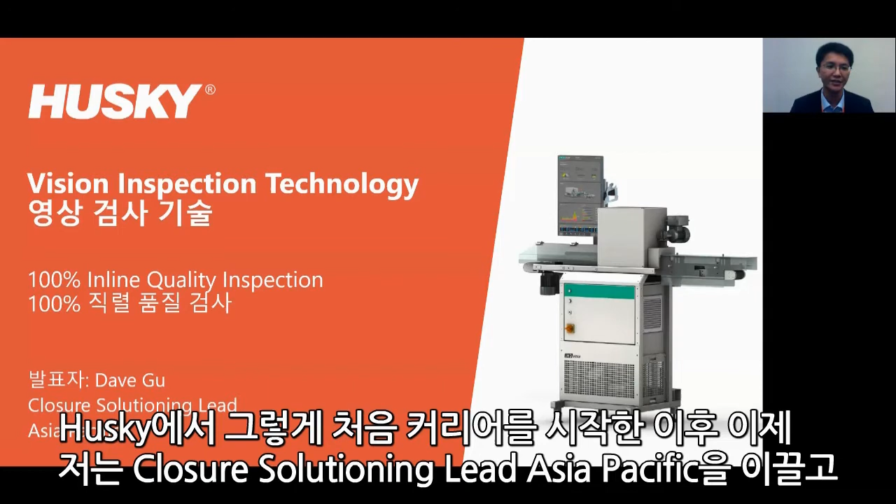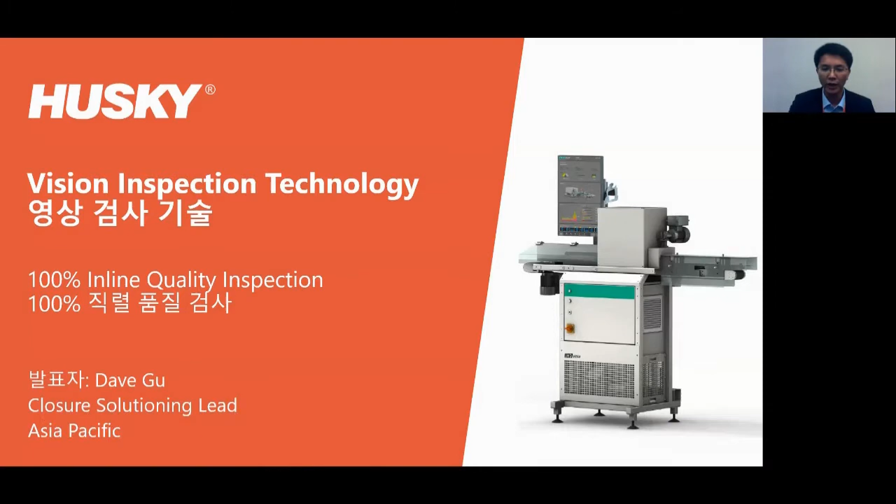In case any questions, we can review later in the Q&A session. First of all, before we run into the details on the vision inspection camera configuration, here is a quick overview on how the HyCAP4 closure system workcell looks like.

As you can see on the screen, typically for a complete workcell layout, apart from the injection machine and the mold, which is really the critical equipment for the system, there are also quite some downstream equipments to process the closures right after the injection mold. For example, there are multiple downstream equipments, including the hopper, the undermold conveyor, and the cap coolers to cool down the closures after the injection mold. Then we have the feeder conveyors to transfer the closures through the waterfall sorter to orient all the closures and then feed them into the vision inspection system. And then after that, to fulfill the closures into the box shifter.

So here I'm highlighting equipment number item 6, and this is the one that I'm going to share with everyone now.

Now that we know that closure is a goalkeeper for the whole product package safety, it really plays an important role for product safety. And as a high-speed running closure system, it's really important to make sure that all the closures are 100% inspected, and at the end, only the good closures run into the production line.

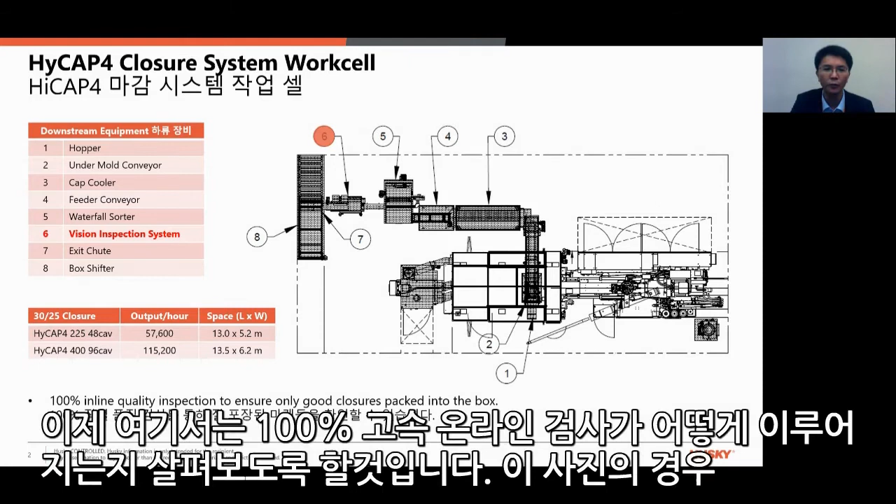So now here is to explain how the 100% inline inspection is working on the Husky HyCAP4 closure system. This picture basically shows you how the vision inspection camera is working, providing comprehensive functionalities to make sure only the good closures bring into the production line.

For example, it includes the inside inspection and outside inspection, the 360-degree outside wall inspection, and we also inspect the top panel of the closures. In the meantime, there's also an additional function for cavity number recognition.

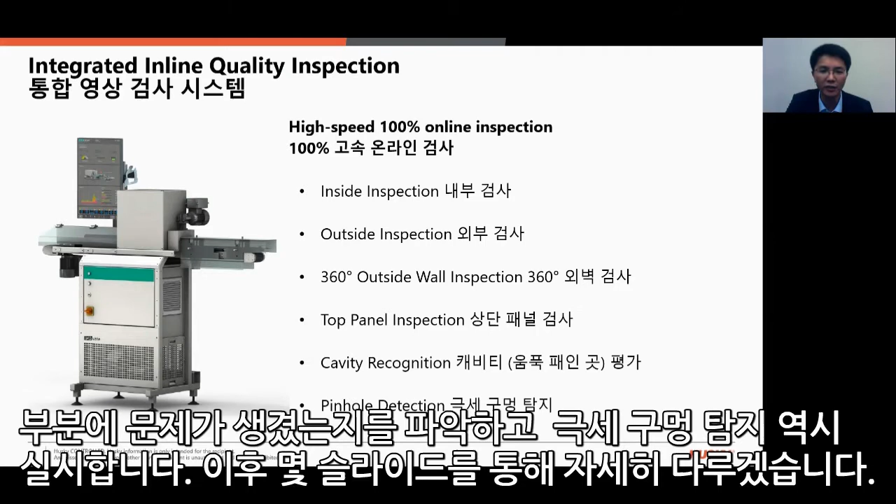This is also very important, especially when we are running mass production. In case there's something wrong in a specific cavity, this function will provide traceability of where the mold has issues. Last but not least, it's about the pinhole detection. I'm going to share more details in the next few slides.

Now here is the typical configuration of the vision inspection camera. Typically, from the right side to the left side, for a comprehensive configuration there are basically 2 conveyors delivering all the functions that we just mentioned in the previous slide.

For example, there are first a few cameras on top of conveyor A to inspect the closures from the inside, and the ovality and cavity number reading functions. And after that, there are also 3 cameras to inspect the closure outside wall 360 degrees that we just mentioned.

As we just mentioned, we also inspect the closure top panel. On conveyor A, there's no chance for us to inspect the closure top panel. Therefore, we need to shift the closures onto conveyor B so that camera 3 can detect the top panel of the closures in this case. So this is typically how the configuration looks like for a vision inspection camera.

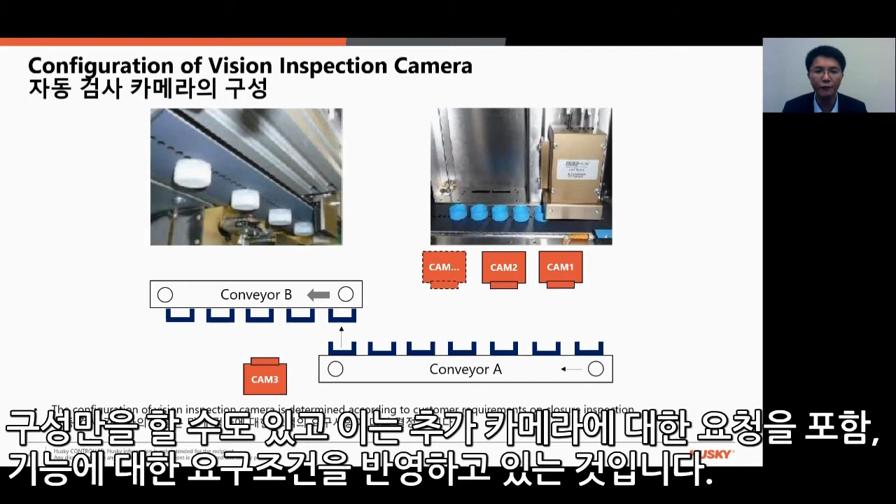Now we are going to run into the detail of each function, how they work, and what defects can be detected from these cameras. Number one is about the inside inspection, and this is the default option. It's typically the very basic and mandatory one that most of our customers' systems are equipped with. First of all, such a camera for inside inspection detects short shots on the tamper evidence band.

If our customers are running closures with color, typically at the initial start there may be some slight color deviation, and this camera will be able to detect this color deviation and reject these closures to the scrap box. So as mentioned, this inside inspection is mandatory and important to make sure all the inside of the closures have good quality, as in the end the inside is the one in touch with the preform neck finish to deliver package safety.

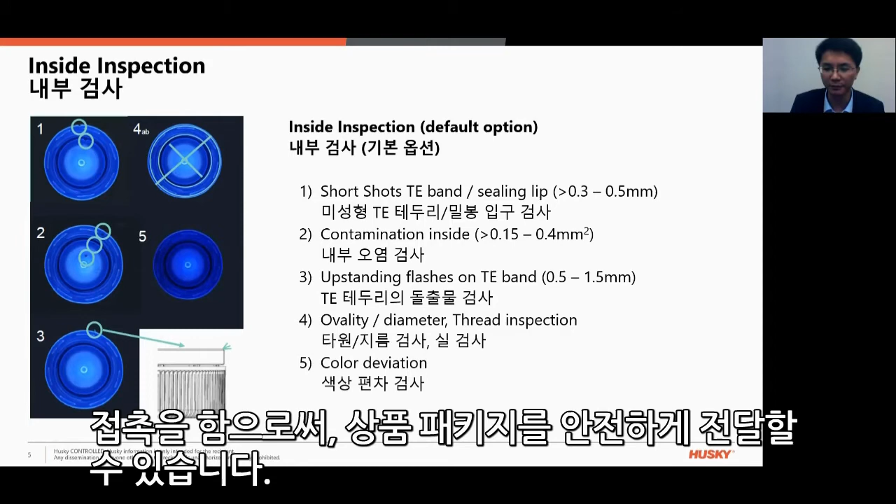Second thing is about the outside inspection. The first one we looked at was purely inside. But if there's some minor flashes in between the TE band and the closure shell at this specific corner, then this outside inspection camera will be able to find these horizontal flashes on the TE band, covering sizes down to 0.3 to 0.5 millimeter.

In addition, this outside inspection camera will also help precisely detect if there's ovality or defects on the closures, and it can also precisely monitor if the closure is the right size and right diameter, as precise as 0.05 to 0.15 millimeter in deformation.

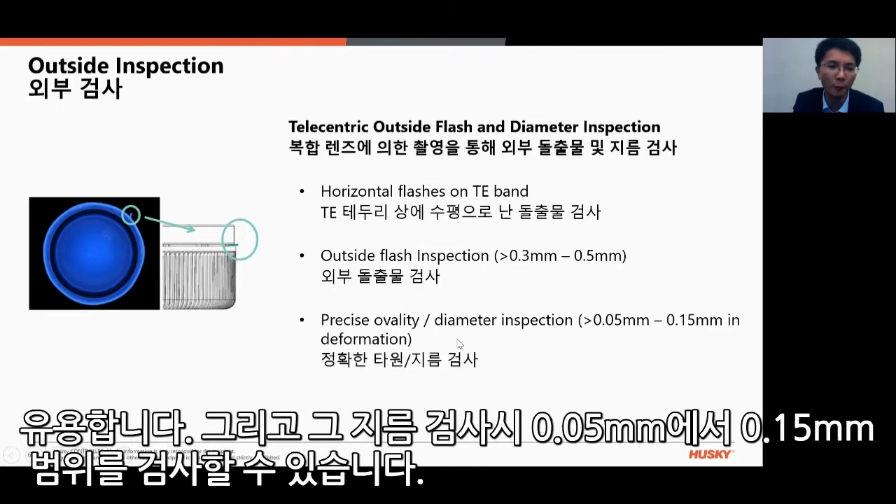Now the next one is 360-degree outside wall inspection. This is different from the previous one - this is for sidewall inspection. This is typically equipped with 3 cameras, each covering 120 degrees, so you have the whole circle, 360 degrees, covered by 3 cameras.

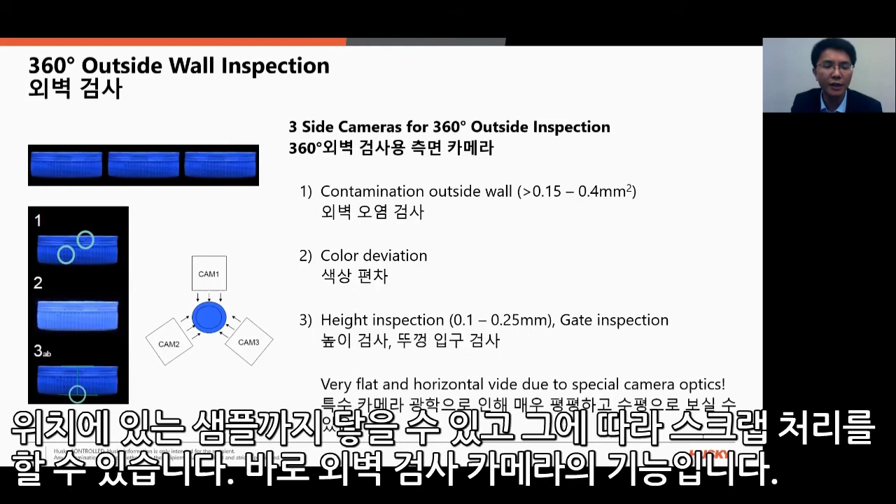This wall inspection covers contamination outside and color deviation, as well as height inspection, since these 3 cameras inspect the closures from the sidewall. Therefore it's capable of inspecting if the closure height is within a certain range. And if there's some process change or material contamination leading to high gate at the injection point, this outside wall inspection camera is fully capable of rejecting these high-gate samples to the scrap box. So these are the functions provided by the outside wall inspection camera covering 360 degrees.

Another one is the top panel inspection, which is on the second conveyor. On the first conveyor, the closure sits upside down with the mouth opening up, so there's no chance to inspect the top panel of the closures - for example, if there's a printing logo.

Therefore we need this second conveyor, called conveyor B. The closures are held by a vacuum pump so they can stick to the second conveyor, and then another camera inspects the closure top panel underneath. This is to inspect contamination on the top panel or color deviation, and if there's a printing logo on top of the panel, this top panel inspection camera is also able to detect if the printing logo is properly done or not.

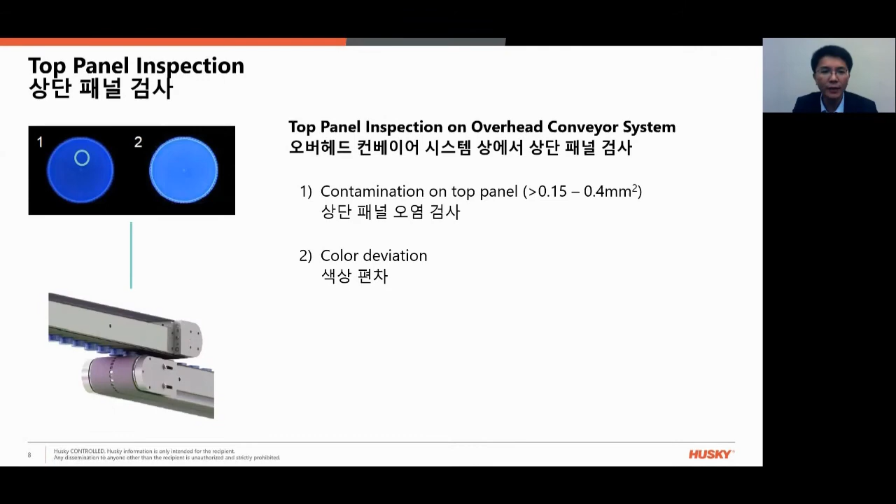Another very important function for traceability of closure quality is cavity number recognition. For example, if we're running a 96-cavity system and one or a few cavities are producing scrap closures with defects, this cavity recognition function reads the number and does cavity-related statistics, giving a report on which cavities the scrap samples came from, then raises an alarm to the operators so they can correct the issue. This is very important for quality issue traceability.

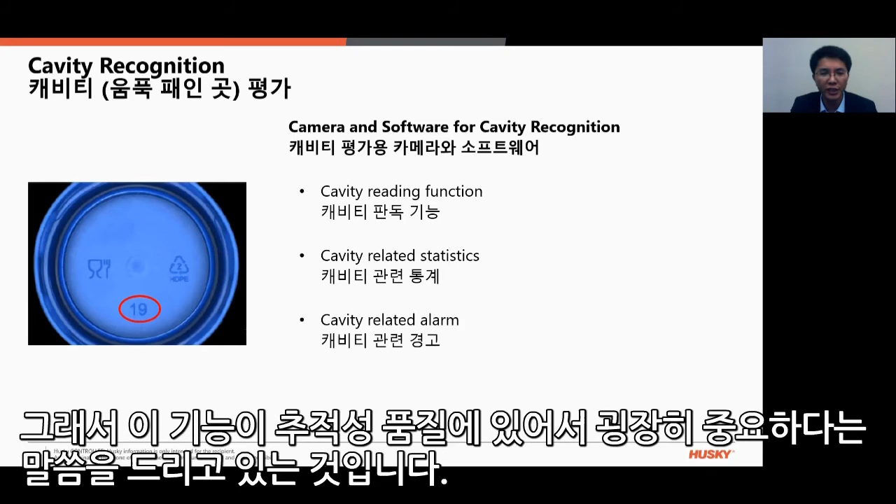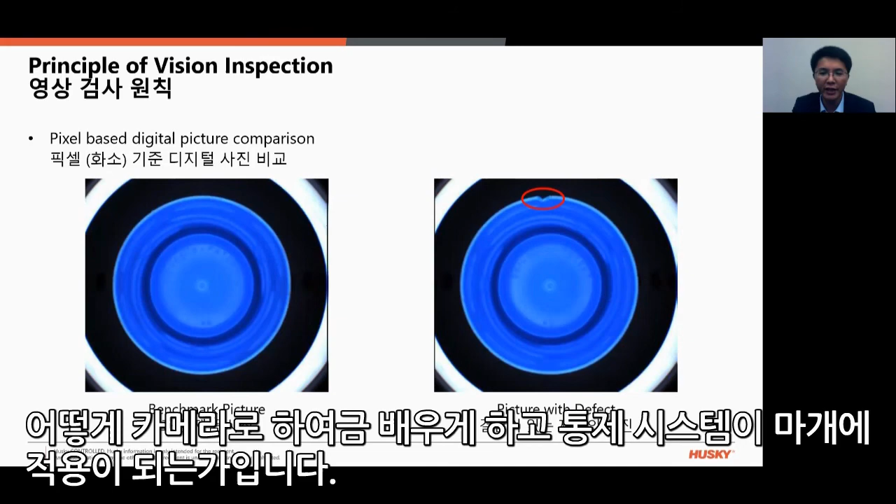When we talk about all these functions delivered by these fancy cameras, the principle behind it is basically simple - pixel-based digital picture comparison. First we teach the camera, teach the vision system with good closures, and it takes pictures of the good closures as a benchmark. Whenever a defect appears in the next closures, it compares the pictures on a pixel basis to determine if those are scrap samples, and they get rejected. So in fact it's a very simple principle, but the key is how we teach the camera and how the controlling system defines and rejects the closures.

Last but not least, in case there's a process change or material contamination that creates a pinhole on the top panel of the closures, this could lead to product safety issues with sealing defects. Therefore we have a solution with the spark tester, called pinhole detection, that separates and blows out those bad parts - basically very gentle handling through a high voltage source. All closures with a micro pinhole on the top panel will be detected and rejected to the scrap box, and they will never run into the production line.

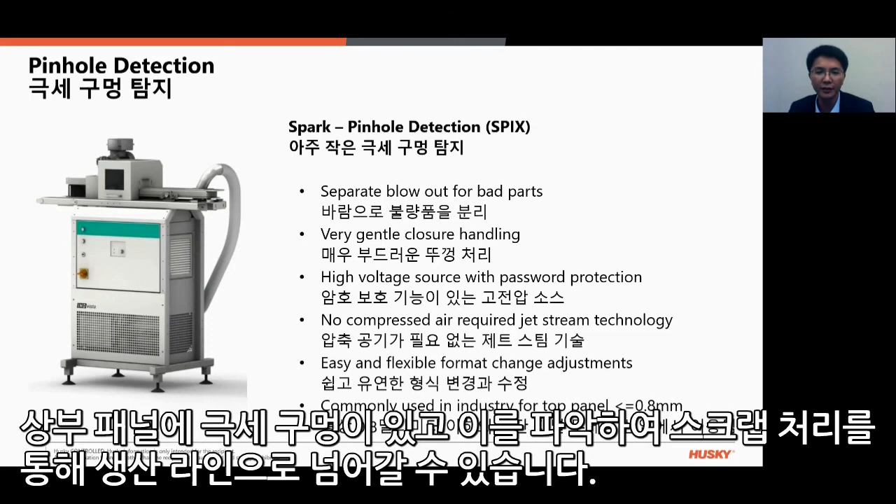So here is basically all the functions about the vision inspection camera. In case you have any questions, we can discuss later in the Q&A sessions. Thank you.